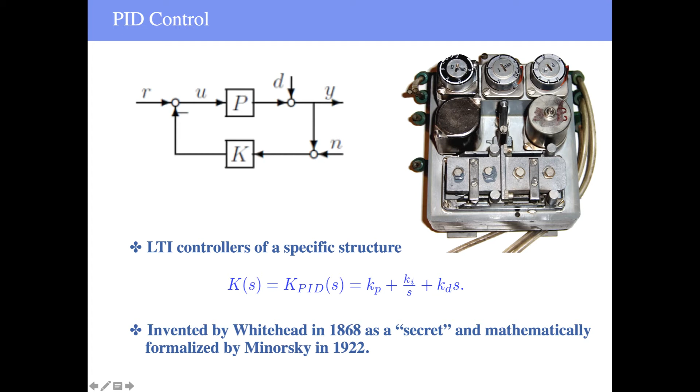So it's kind of amazing that after 150 years, with so many new techniques and methods developed, PID control remains very strong. And in the last 5 years or so, IFAC conducted 2 surveys polling many industrial leaders and industrial experts to find out what kind of control technology has a higher impact. The question is quite simple and blunt.

Of all the technologies, control techniques, which has the highest impact? So the answer is quite overwhelming and very clear: PID. As you can see, in 2015, this acceptance of PID control is 100% universal.

And in 2018, as you can see, the question also includes the prediction of future impact, where you see that MPC, model predictive control, started to gain some momentum, but still PID control would remain a primary technique and device to be used in real-world industrial implementation. And that has a good reason.

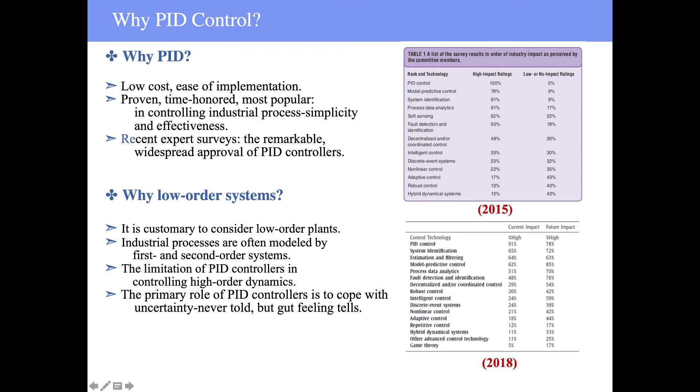With so much done and known, what can be new and what further can be said about PID control? Well, even as beginners, we have often been told that PID control is good, it works. But why is it good? And how good is it? If it is good, there has to be a reason, right? As I'm quoting this word from Chairman Mao.

So let me just say a few words in Chinese.

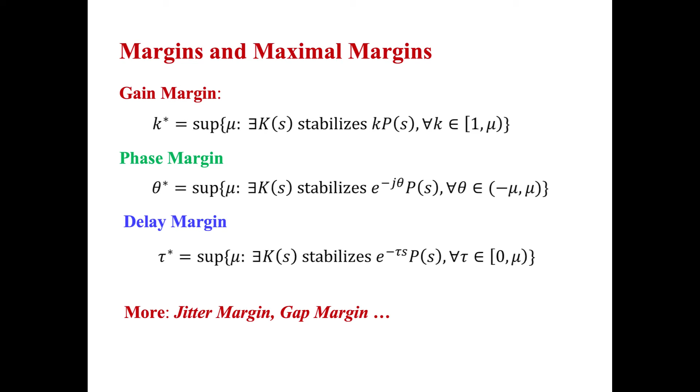In the classical and present setting, we focus on LTI controllers. You can certainly generalize this notion, for example, to adaptive control using whatever sophisticated means of feedback. There are certainly other notions like jitter margin and so on, which I'll mention at later points. So I'll begin first with the gain and phase margin.

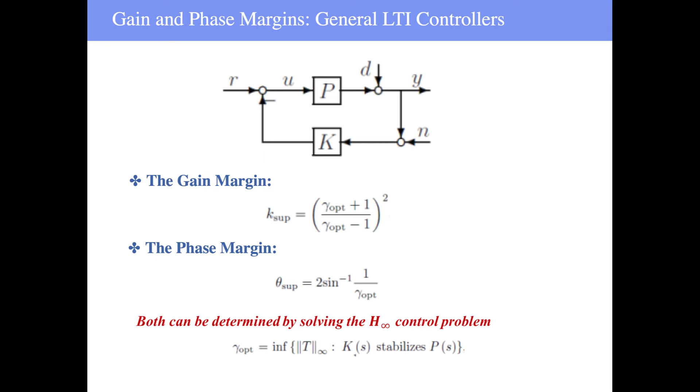Gain and phase margins are concepts we became familiar with in the first course on the fundamentals of control theory, right? When you want to maximize these margins, you can actually do it analytically by solving a very simple and standard H infinity optimal control problem. The problem is posed at the bottom of this page, and that gives you an analytical solution of the maximal gain and the maximal phase margin. And with this T, I forgot to say what T is: it's just the system's complementary sensitivity function.

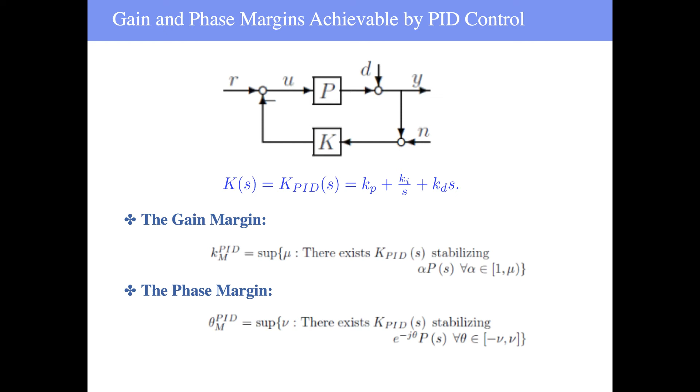So what about PID control there? Well, the problem formulation is exactly the same, but with the general LTI controller K replaced by a controller of a specific structure and complexity. This is a fixed structure feedback controller, and we know that whenever you have something fixed in structure, you are constrained in the degree of design freedom. So this problem is actually harder than with a general LTI controller. It becomes a parametric optimization problem over the three coefficients Kp, Ki, Kd, as opposed to the H infinity optimal control problem, which is a non-parametric optimization problem.

So we, for good reason, consider low order physical plants, specifically first and second order plants. For the first order plants, the solutions are quite simple and clean. So you can consider two cases. On the left, you have the minimum phase plant. On the right, you have the non-minimum phase plant.

So for the minimum phase plant, you see that the gain margin is infinity, and phase margin is 180 degrees, pi, and this is the maximum you can achieve using any kind of controller. So what can we say here? For first order minimum phase plants, the PID controller, actually we're just talking about proportional and PI controllers, is as good as any controller, okay?

And for the non-minimum phase plant, you see that it now depends on the ratio of the two, namely the distribution of the open loop unstable pole and open loop non-minimum phase zero. And one thing you can see is that the margins, whether gain or phase margin, are the same for proportional and PI controllers, which implies that the integral control has no effect in terms of enlarging the gain and phase margin. And this will be a consistent observation throughout this entire presentation.

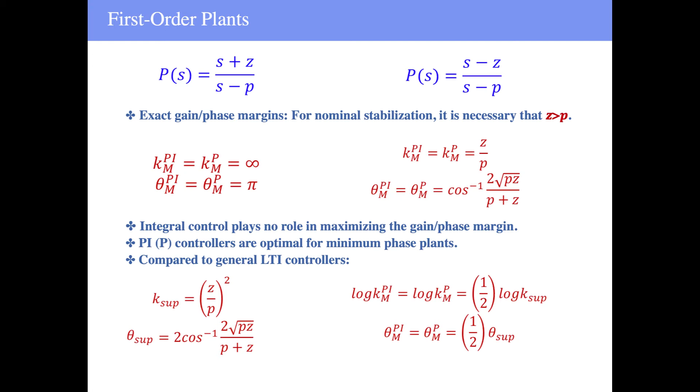So what about the full PID controller? If you use a PI controller, you can only get half of the maximum possible, so you want to ask, what if I use the full PID controller? Notice that this plant is of relative degree 0, so you cannot really implement the derivative control. That would lead to an improper system, which doesn't satisfy the causality required of any physical system.

What you can do is use a filtered version of the PID controller, namely design the PID controller and also appropriately design a low-pass filter. This is actually standard practice in the physical implementation of PID controllers, because of the difficulty of implementing derivative control. With that, you can fully recover the maximal gain and phase margin with this added degree of designing the low-pass filter.

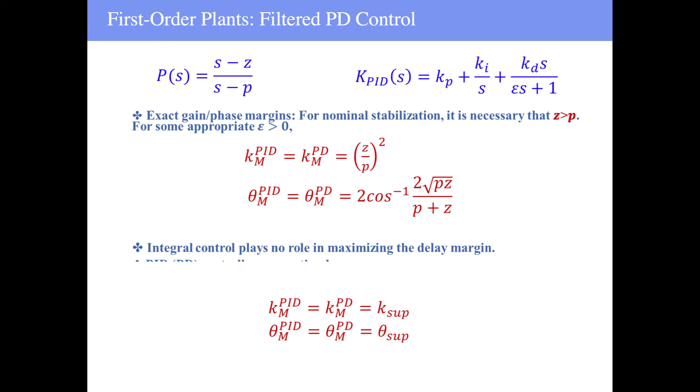All right. So what I'm saying is, for first order plants, whether minimum phase or non-minimum phase, PID control is as good as any controller, or at least any LTI controller. Okay.

So you certainly want to go further to see whether this kind of very strong statement would work for second order systems. So we consider this. This is a second order system with 2 unstable poles, P1, P2, and a non-minimum phase zero, Z, which is really the most troublesome second order system that you can expect, right?

And having said that, I should add that if you have this kind of a second order plant with a minimum phase zero, namely this S minus Z is replaced by S plus Z, still you can show that the maximal gain and phase margins achieved by PID would be respectively infinity and pi. Namely, for second order minimum phase plants, you can make the same statement. You can draw the same conclusion that PID control is as good as any other LTI controller.

Okay, and that's why we concentrate on the second order non-minimum phase plant. Well, the problem becomes harder, actually considerably harder, but you can still do something the same or similar. For example, you could have these analytic expressions for the gain margin, for proportional, PI, PD and PID controllers.

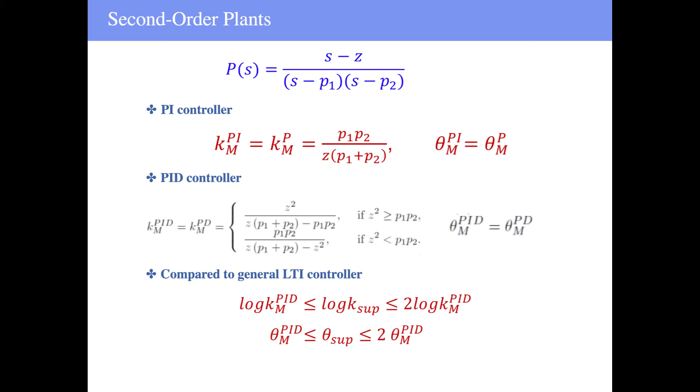Okay, so let me recap a bit then. The other thing I should mention is that for second order plants, you can also see that the integral control, whether you use PI or PID, plays no role in giving you these goodies. The reason is that, as we know quite well, integral control is typically introduced, and this has nothing to do with PID control alone, for general control purposes, in order to track a set point reference signal, right? So this is essentially a performance consideration.

Now we have the heuristics, the insight that performance is always seen as a trade-off with the system's capability for stabilization. And that explains why integral control doesn't give us anything extra in terms of getting those margins. And actually, you can show, which certainly philosophically makes sense, that integral control reduces those margins.

Okay. What about proportional control then? It doesn't contribute anything in terms of phase lag or lead. It's static, right? Memoryless. So it has little effect on the margins. So in all these cases, as you can see, the PD controller always outperforms the proportional control. So that tells us the derivative control really plays the main role here. It has the effect of improving gain and phase margins.

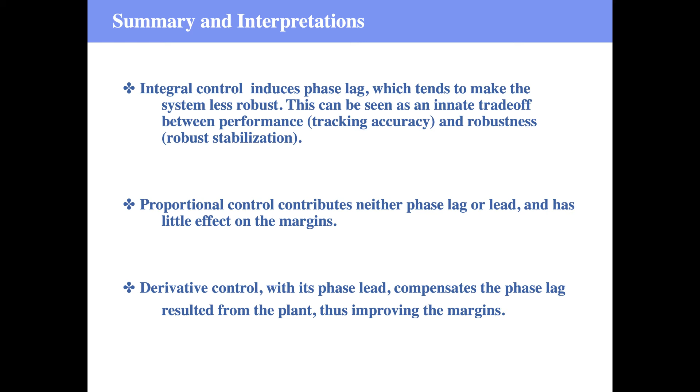And the essential reason is that I already stated that if you have minimum phase plants, you can get the maximum possible, right? Only with non-minimum phase plants will the gain and phase margin be constrained to a certain upper bound. Non-minimum phase plants always display this phase lag, and derivative control gives you a phase lead, and therefore it compensates the negative impact imposed by the non-minimum phase zeros.

Okay, let me switch gears a bit to come down to the delay margin. Mathematically, this is a more interesting problem, though sometimes it even appears simpler than the phase margin problem, contrary to what we believe. This problem is similar. All we care about is that if you have delay plants with an unknown or uncertain delay tau, whether you pose it as a transfer function or in state space form, you want to ask what is the largest range for this unknown or uncertain tau that your feedback controller can tolerate.

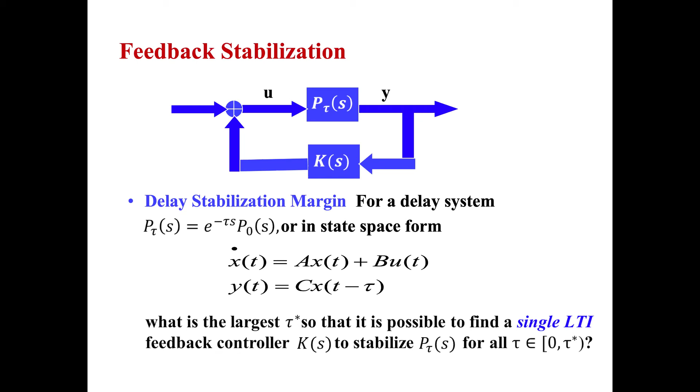That is, you want to find a single feedback controller, let's say an LTI controller, to stabilize this entire family of plants with a varying unknown delay parameter tau. So in comparison to the gain and phase margin problems, we now have a delay component, namely a varying factor e to the negative tau s. And that makes the problem considerably harder conceptually, because now we end up with an infinite dimensional system.

So it should be mentioned for all these notions, whether it's gain and phase and delay margin, if you do have a stable plant, those margins are always infinity, or in the case of phase margin, 180 degrees. So the problems are essentially meaningful for unstable systems, because we talk about stabilization. If you do have a stable plant by itself, you don't need to do anything, right?

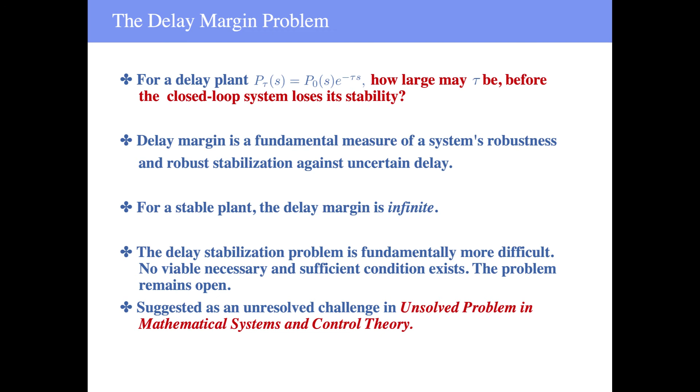So we know in general that we cannot solve the problem with a general LTI controller. What about the PID controller? Presumably you'd think that this could be even more difficult, right? Because with a much higher degree of design freedom, you cannot solve the problem, and now you have a restricted degree of freedom. Do you expect to do better? Well, we have a very pleasant surprise, and we actually can solve this problem.

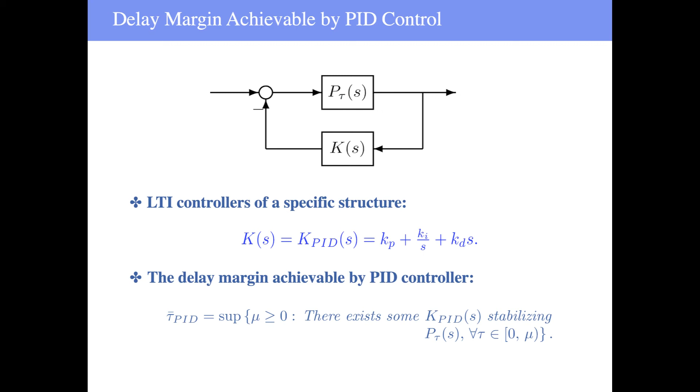And one thing we come to note immediately is that whether you use PID or PD or the general, this tau bar represents the delay margin achievable by any arbitrary LTI controller, they're all the same. So again, you can make two statements. First of all, the integral control contributes nothing in terms of maximizing this delay margin. And secondly, for first order delay plants, PID control is as good as any LTI controller.

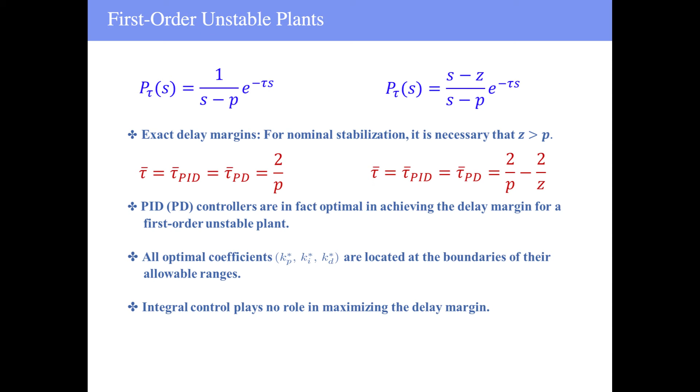Well, that actually takes us to second order delay plants. What we know here is that in general, to determine the delay margin is quite a difficult problem. What you can do is use brute force search. But the brute force search doesn't give you the certificate that you actually get to the maximum. You can always come up with some solution, but you don't know whether that's a local or global solution. You don't have these certificates.

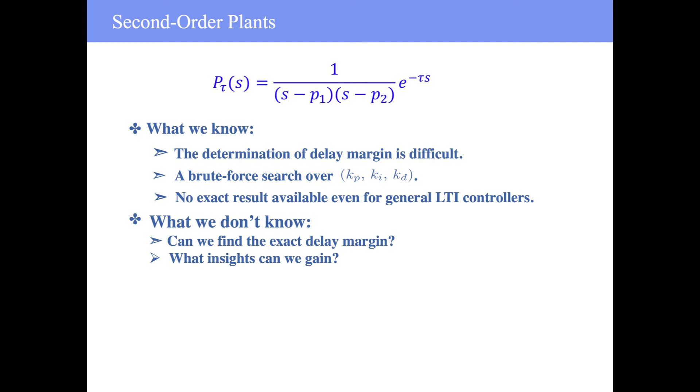So as I mentioned, no exact result is available when you use general LTI controllers because the problems are still open. So quite naturally, we wanted to know with a PID controller, is it possible to solve this problem, namely to find the exact delay margin? And more important, can we draw the kind of insights and conclusions like we did for first order plants? Well, it turns out for second order plants, the problem is considerably more difficult. And the difficulty arises from two reasons.

First of all, you need to optimize a cost function like this, subject to a set of quite sophisticated constraints. And this function is highly nonlinear. Now the constraints consist of those conditions to ensure that the closed loop system will be stable in the delay-free case. Namely, you have a bunch of inequalities resulting from the first column of the Routh-Hurwitz criterion. And furthermore, this is what kills us.

This constraint consists of an algebraic equation, which boils down to solving for the crossover frequency that we necessarily have to use in this objective function, the function we want to maximize. So whenever you have this kind of algebraic constraint, the polynomial equation constraint, it has multiple solutions. So this as a whole will give you a highly nonlinear and non-smooth optimization problem. That's what makes the problem difficult analytically.

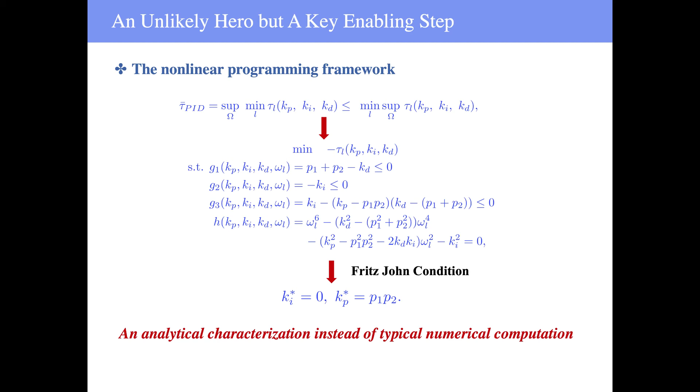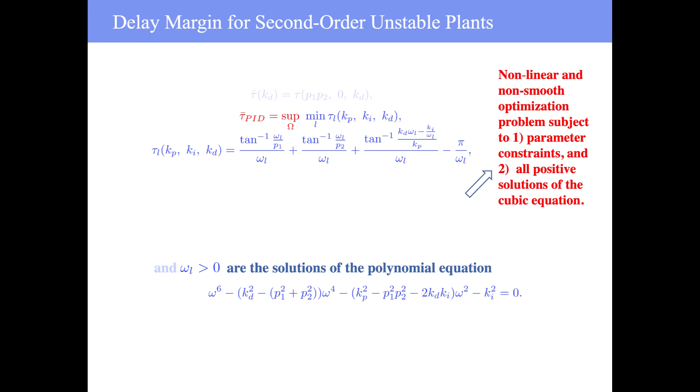And so we use the first order necessary condition for optimality to really pin down the PID coefficients, to see what range those coefficients must lie in. And it turns out the proportional coefficient, here Kp star, and the integral control coefficient must be on the boundary of their allowable ranges. So as you can see, these are exactly the boundary of their respective range.

All right. So with that, the problem reduced. You have two coefficients already constrained, fixed. So you are left with only one, that is the derivative control coefficient.

Someone's reminding me you're close to conclude. Yeah, I only have a few, I think 3-4 pages. But anyway, let me pick up a bit of pace. Thanks for the reminder, Joe.

So, in that sense, we are down to a maximization problem in one parameter. If you do brute force search, you need to deal with 3 parameters. Now we show that you need to deal with only one parameter, the derivative control coefficient. And what is even better is that this function you want to maximize in one parameter is actually a pseudo-concave function, which means that you have a unique maximum, and it's differentiable.

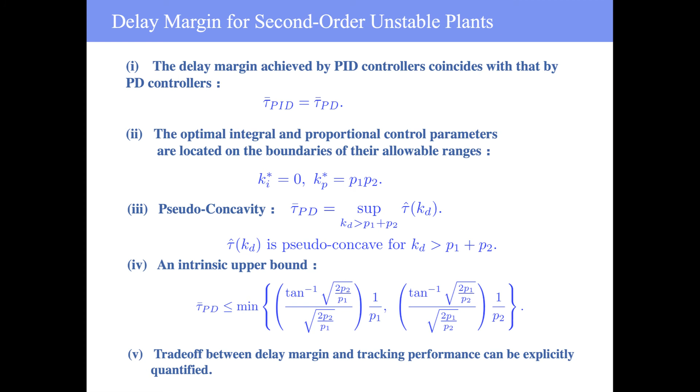All right. Okay, so I think I pretty much said this essentially, so I'll skip this. Well, no. So these are the interpretations. Let me quickly run through this. For second order systems with a delay, we have seen that PID controllers and PD controllers achieve exactly the same delay margin, namely the integral control, just like what we have seen previously, has no effect in terms of maximizing the delay margin.

The proportional control gain, Kp, is located at the boundary of its allowable range, which means that proportional control doesn't have much effect either, although it's necessary. Now, I have said this about the reduction from brute force search in 3 parameters to the search of 1 parameter as a unimodal problem.

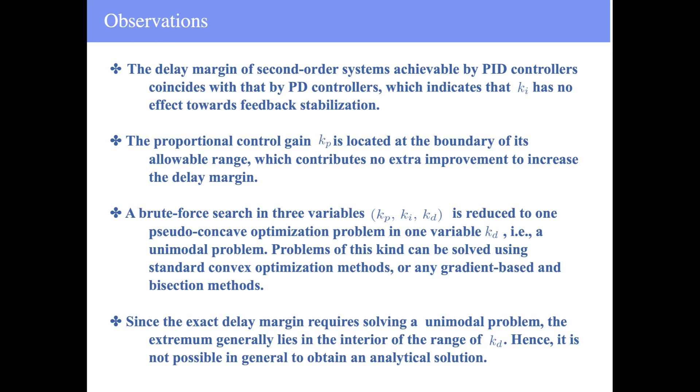Now, one thing worth noting is that since the exact delay margin requires solving a unimodal problem, the extremum, the maximum, generally lies in the interior of the variation range of that one coefficient, KD. So unlike in the case of first order plants, it's generally not possible anymore to get an analytical solution. Namely, this one-dimensional convex search is as good as you can get.

You can interpret these results more broadly. For example, if you plot out the frequency responses of the PID controller, on the top you see the gain plot, and below you see the phase plot, and you immediately see that this looks like a notch filter. So if you have some uncertainty in the middle frequency range, and the middle frequency range is the most important range for design, right?

Then this PID controller actually compensates the plants very well, and this is perhaps why in mechanical control, in precision motion control systems, oftentimes you see PID controllers for suppressing vibrations and so on, because there you have slightly damped modes, modes with a high magnitude peak, right?

And you can also interpret this, for example, from the Bode gain-phase relationship. You can see that the loop gain is actually quite what we want to see here in the low frequency range, and in the high frequency range there's a very desirable phase lead. And that explains, using the gain-phase relationship, why this PID control would perform well.

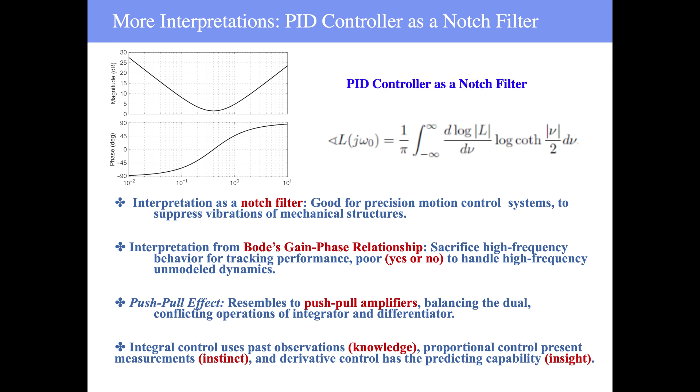So I'll skip the extensions. A lot has been done by, for example, Qi Mao and Chen, my students. What you are seeing here is just a small portion of the results, and quite a lot has been done on multi-agent systems. And I mentioned the jitter margin, which really concerns the random delays in sampled data systems. Back in the early 1990s, there were people working on simultaneous variation of gain and phase. So they call it gain and phase margin.

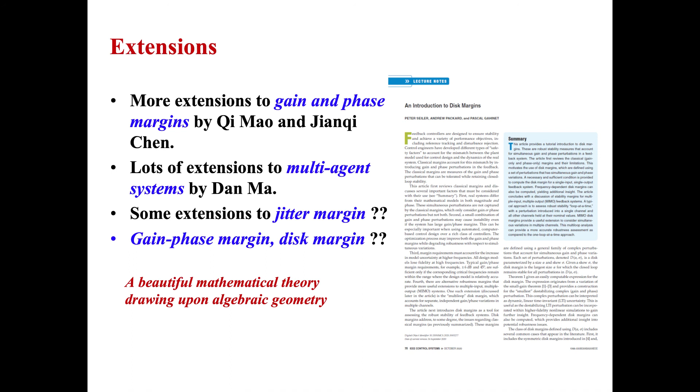So I wanted to mention that in all these works, the problems are actually much harder than they appear, and there's a really beautiful mathematical theory behind it, drawing upon algebraic geometry, and there's also a backbone using nonlinear programming as a tool.

So in this same issue of IEEE Control Systems magazine, I saw on the back cover a lyric on PID by this guy, Daniel Abramovitch. He claims he wrote this lyric in 2012, and it is adapted from a famous song by Paul Simon. A lot of people, especially young people, know this name, Paul Simon. He wrote the brilliant, famous Sound of Silence, one of the most popular songs of all time. This other one is called Kodachrome. So let me just play a bit. I'm not sure you can actually hear it.

So what is this song about? Well, it's about this film, Kodachrome film, right? It's a good thing because it transforms a bleak, black and white reality into a very colorful world, enriches our life. So I think in a certain way, PID control is similar. It turns a world of no control into a world where control is everywhere, omnipresent.